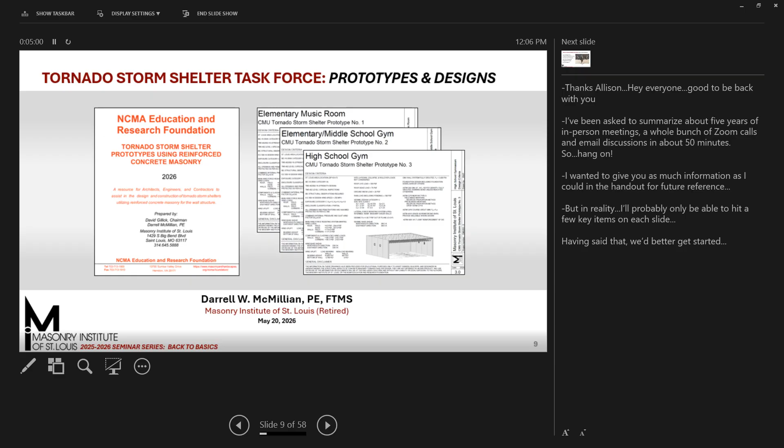Based on the learning objectives, here's what we will try to discuss today. To save time, I'm assuming everyone knows the dangers of tornadoes, so I don't have a lot of facts and figures on past ones for you. But I would like to ask, has anyone here personally experienced a tornado?

By the way, I want to say at the outset that the building code has provisions for both hurricane and tornado shelters. But today, if I only say storm shelter or shelter, just know that I'm talking about tornado shelter, since we don't get too many hurricanes around here.

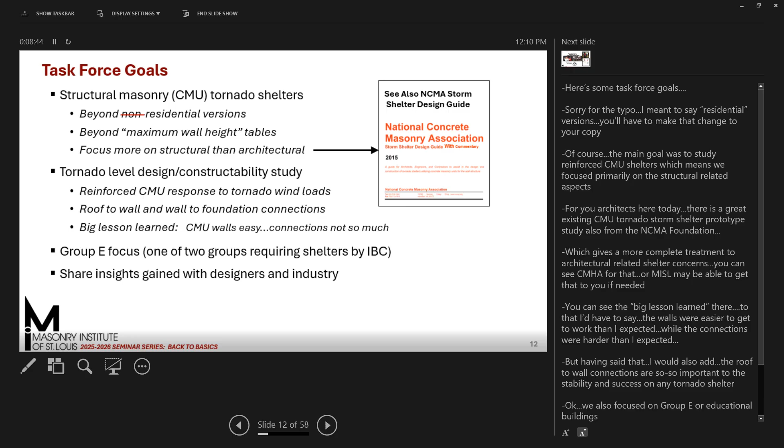Let's see. Okay, make sure I get everything down there. So let me make sure I didn't go too far. Sorry, did they mention I'm retired? It's been a while since I did some of the stuff. I actually brought 2 pairs of glasses because I wasn't sure which ones I would need.

Okay, in terms of expected outcomes, it was this, no, wait a minute, sorry. Here we go. The first expected outcome was to hold a storm shelter summit, which we did here in this room in 2021 to figure out what we wanted to do and how we wanted to go about it.

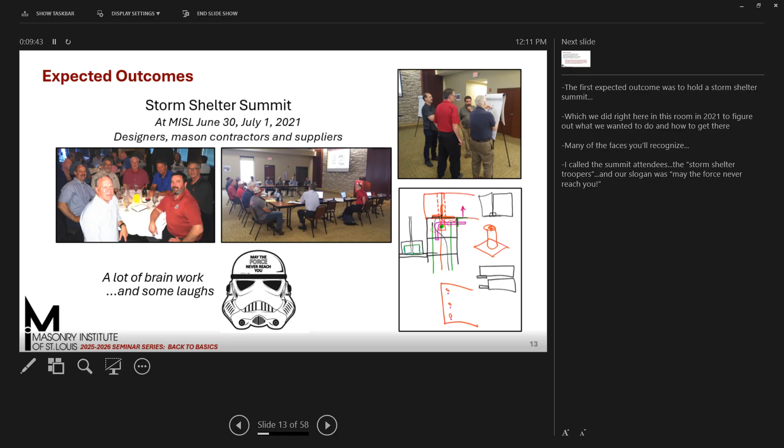Again, many of the faces you'll recognize as past presenters and being around the Institute here. I called the attendees storm shelter troopers, and our slogan was, 'May the force never reach you.' So there was a lot of thinking, but we had a little fun too. And of course we had to go out for some Italian on the hill. That was a requirement.

So it was decided to do 3 prototype studies and offer them up as shelter examples for educational purposes. And to that end, you'll see this red disclaimer here and also in the drawings and the report. The key thing I just want to mention is that we're not intending these to be shovel-ready documents. These are just examples, or a snapshot really, of a particular building responding to a tornado. But hopefully they'll be useful as examples in the future.

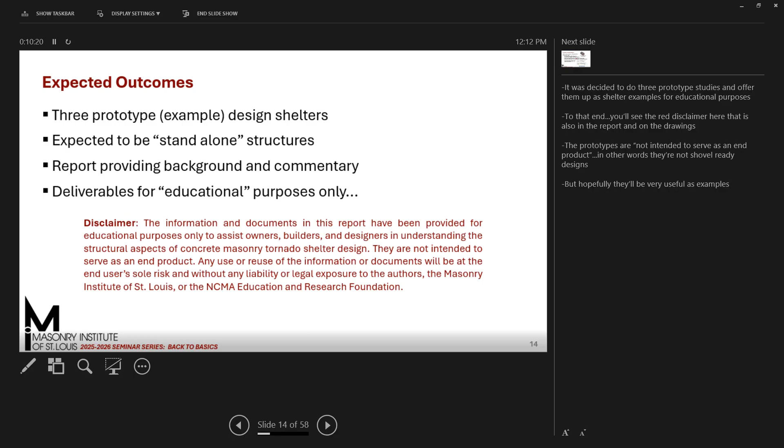As far as some of the decisions we made, most were related to challenges that came up, things we hadn't thought about before or whatever.

We did select CMU for the walls, I guess there's no surprise there. However, structural clay units could also have been used. You can design them practically the same way as concrete masonry units, so that is an option.

We decided to go with one small classroom and two sizes of gymnasiums, and all three would have varying roof systems. We knew going in that the walls were going to need to be fully grouted, primarily to provide the missile impact resistance that the ICC and FEMA require. We just automatically assumed we'd fully grout these walls, although we probably would have gotten there by design anyway due to the high wind loads.

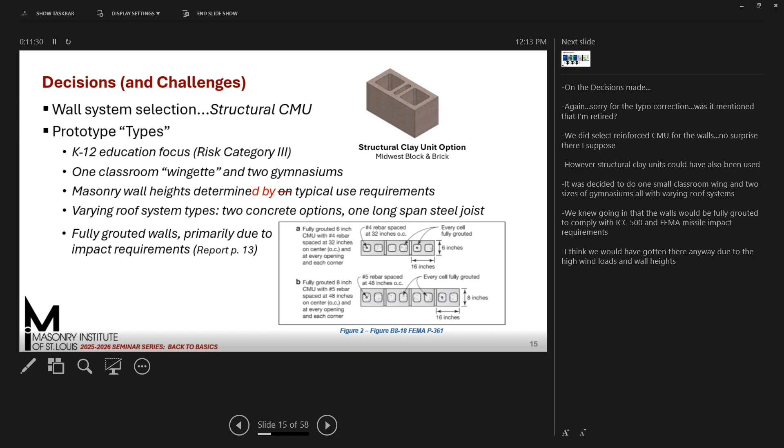Speaking of codes, in 2021 when we started the project, we decided to go with the 2018 IBC because most of the country was using it, or an older version. That has shifted some since then, as areas have moved on to the 2021, as you can see there in the green box.

However, since the 2021 IBC still references the 2016 editions of ASCE 7 for load determination and TMS 402 for masonry design, we decided to go ahead and complete the project under the 2018. We don't suspect there would be a lot of structural tweaking needed if you wanted to look at these examples in terms of the 2021 IBC.

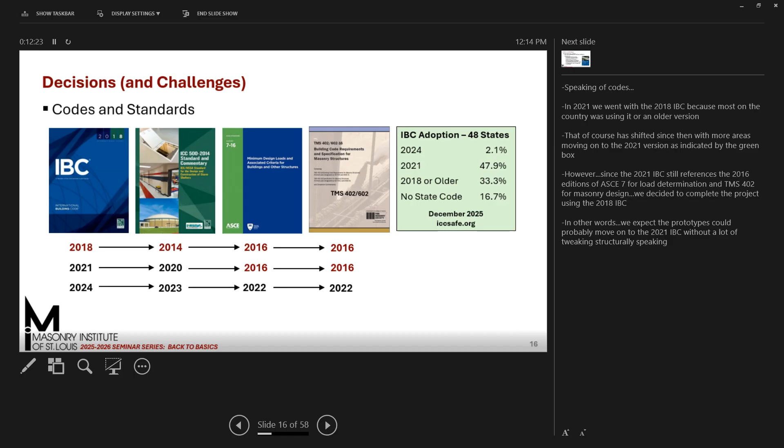2024 would be a little bit different, but now FEMA P361 is another standard you could use for shelter design for safe rooms, as FEMA calls them. In general, if the shelter is designed per P361, it will also comply with ICC 500.

Though we didn't use it directly for the prototypes, we did incorporate some P361 items into the design where we thought it was prudent. One example is we decided to go with their guideline of increasing the internal pressure related to the external wind from 0.18 to 0.55, which is about a factor of 3.

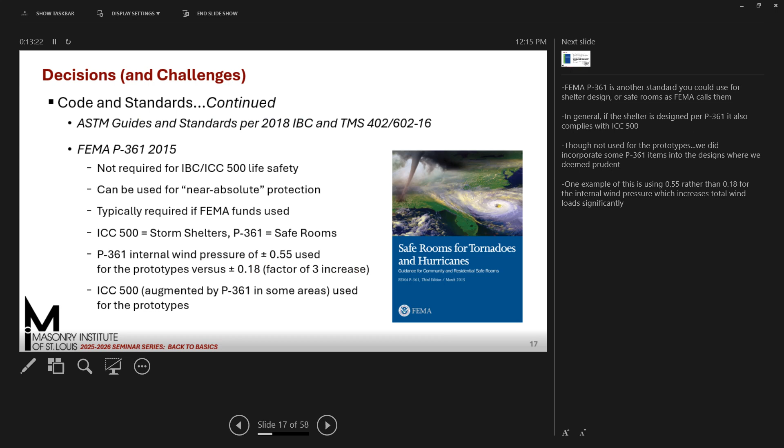So we thought, to be on the conservative side, we would go ahead and do that. On a normal building, you could probably count on 0.18, but with a storm shelter, we decided to go with 0.55.

A quick note about ASCE 7-22: they have added Chapter 32 on tornado load. It's a new chapter, but it doesn't apply to ICC 500 storm shelters.

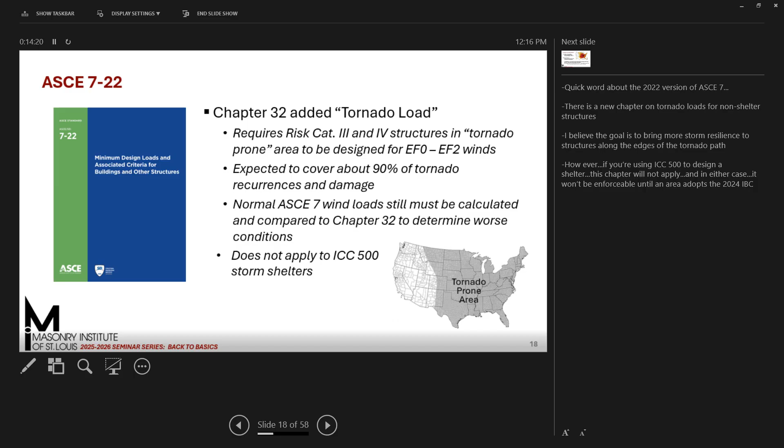So if you're required to do a storm shelter under ICC 500, in the future this chapter would not apply to you. I believe the goal here is to bring more storm resilience to structures on the edges of the storm path. They're looking at EF0 through EF2, trying to increase the amount of wind those buildings are designed for in the future. But as I said, if you're using ICC 500 to design your shelter, this chapter will not apply, and it won't apply until people start adopting the 2024 IBC.

Back to some decisions made. Locating the prototypes right here at the Masonry Institute seemed to make sense, since this building is located at the heart of the 250-mile-an-hour tornado zone.

As for seismic, since we were going to use joint reinforcement for crack control already, and since we expected wind loads to govern over seismic, which they did, we went with seismic design category C to limit the minimum seismic horizontal reinforcement required to W1.7 joint reinforcement, 16 inches on center vertically.

If you compare that to seismic design category D, that minimum would likely jump up to a number 4 bar minimum at 4 foot on center vertically. But since the wind loads were going to govern, we didn't want the prototypes to imply that you had to have horizontal reinforcement just because it's a tornado shelter.

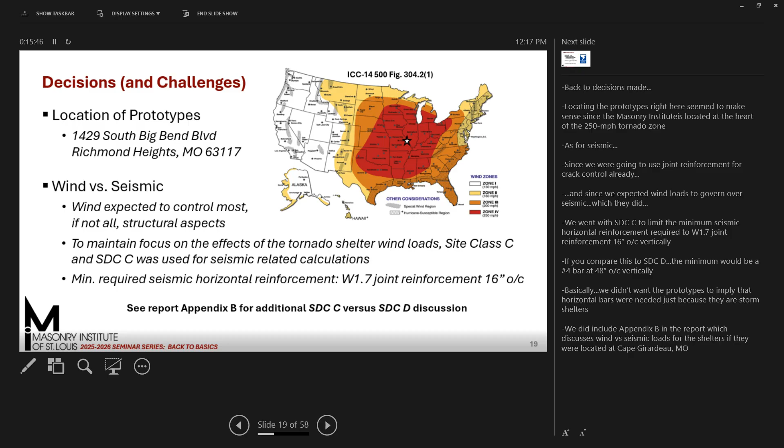If your project is closer to a fault line and your ground motions get worse, then the seismic could come into play. We tried to do a discussion of that in Appendix B of the report, where we took our prototypes and set them in Cape Girardeau and looked at what that did to the wind and seismic loads.

Prototype loads: we used 100 PSF live load, as required by ICC 500. And since we're not doing complete roof system designs for these buildings, we had to make some assumptions on dead load. You can see those assumptions there.

In terms of rain load, it's kind of an interesting one. All buildings, unless they have positive drainage, need to be designed for rain load ponding, but there's a lot of variability to that. We didn't know the final design of the roof, the slopes, or where the drains were going to be. So since you don't have to check roof live load and rain loads at the same time, we decided to put a note saying your rain loads need to be less than 100 PSF for these buildings.

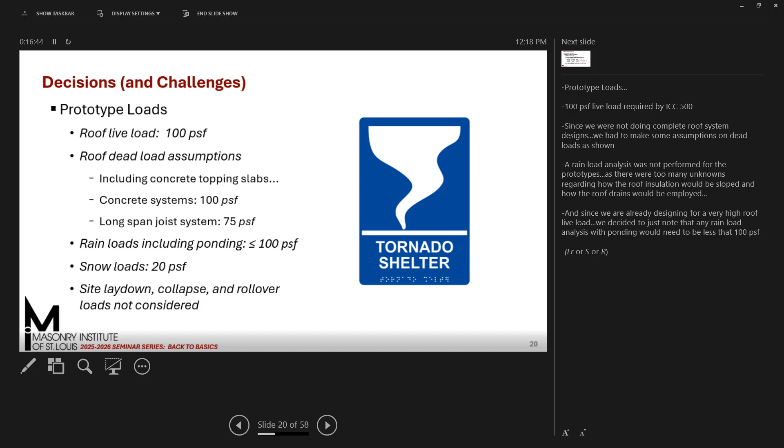Here you can see some additional parameters used for wind and seismic load. The shear wall system we selected was an intermediate reinforced masonry shear wall, which allowed for the joint reinforcement to be used as the minimum seismic horizontal reinforcement. At the bottom I've got a quick comparison of the out-of-plane wind load on walls for the third prototype, the bigger prototype, the high school gym. Seismic is 30.7 PSF and wind is 210.2, so quite a bit of difference in the loading there.

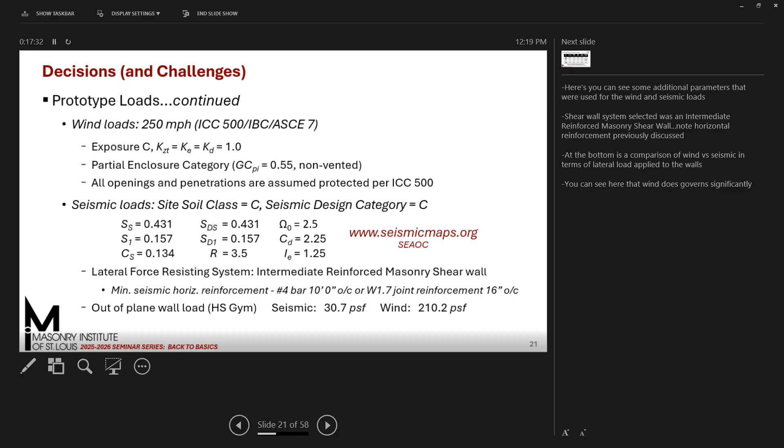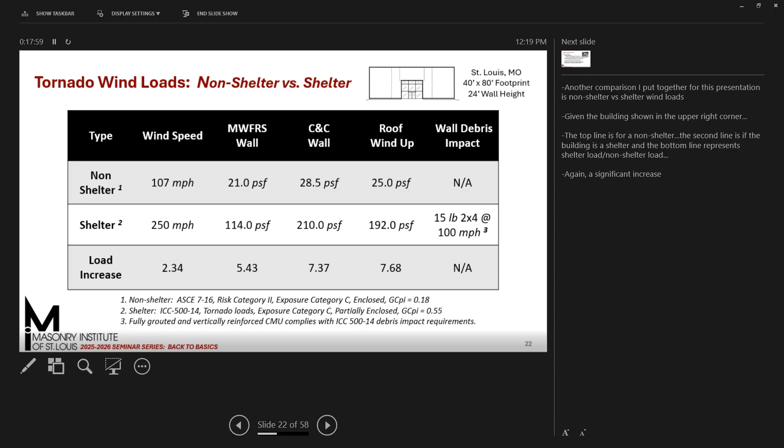Another comparison I put together is non-shelter versus shelter loads for the building given at the top right corner. The top line is for non-shelter, the second line is if the same building is a shelter, and the bottom line represents the shelter loads divided by the non-shelter loads. You can see quite a bit of an increase across the board, so we're dealing with pretty big magnitudes.

Here are some decisions related to the CMU walls. We decided to go with a unit density of 105 PCF, pounds per cubic foot, because it has pretty good availability and also because it would be on the conservative side for calculating wind uplift. The lighter the walls are, the more uplift is going to try to get its way down to the foundation.

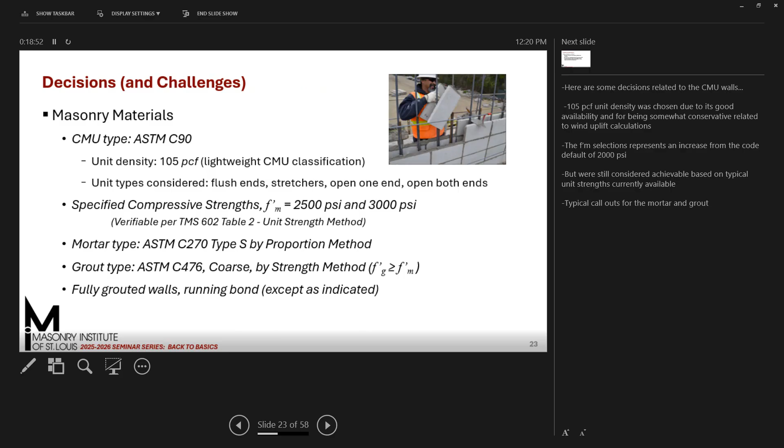The f'm we went with is greater than the current default of 2000 PSI, but we considered that the higher values could still be achievable in most regions, given the block strengths being used. Mortar and grout is pretty much your standard callout, nothing much different there.

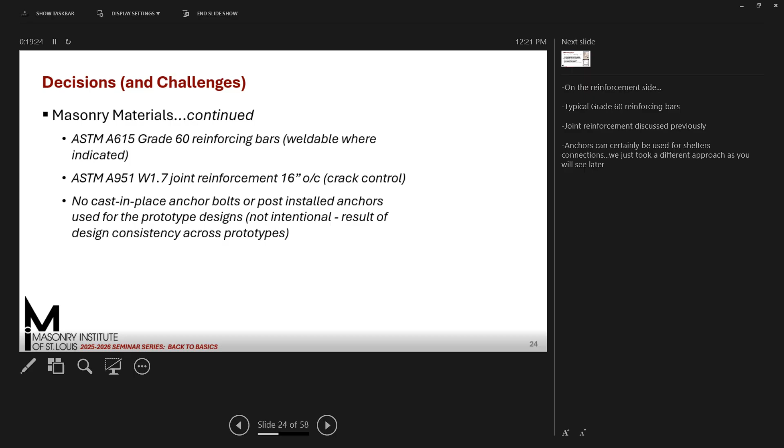On the steel side, we went with ASTM A615 grade 60. Some of those bars need to be weldable, and you can see the joint reinforcement we've already talked about. Now, anchors - the bottom bullet there - we didn't wind up using any anchor bolts or post-installed anchors. You could; there's no reason we couldn't use them on a storm shelter. But given the way we analyzed the connections, the path we went down, we decided to take a little bit different approach, which you'll see a little later.

On the design method, allowable stress design can be used for shelter wall analysis, but for a few technical reasons and preferences, we decided to go with strength design. Also, since most design calculations fell to me - which is probably why it took 5 years - and since I'm not a finite element or 3D model jockey, all the analysis was done either by hand or by spreadsheets I had developed over the years here at the Masonry Institute or while teaching structural masonry at Missouri S&T.

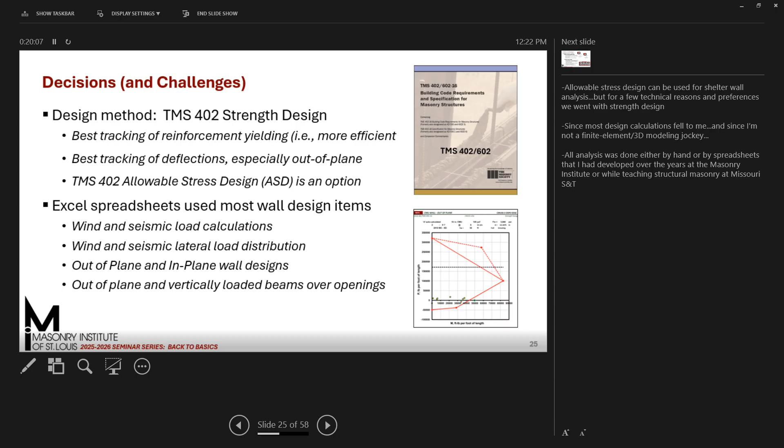Again, since we're not doing complete and final designs for the prototypes, we employed the 'by others' notation in some key areas, mainly the foundations and the roof systems. We did assume the masonry walls were pinned at the top of the foundation wall and at the roof system, and we gave guidance regarding what the walls needed in terms of doweling into the foundations. But otherwise, everything else with the foundations is pretty much just by others.

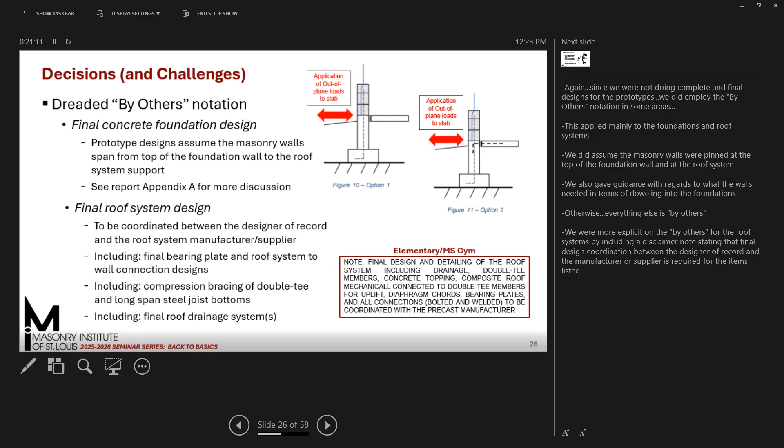We did the same thing on the roof, but tried to be a little more descriptive by including a special note on all the prototypes indicating that final coordination between the designer of record and the roof system manufacturer or supplier is certainly required to come up with final designs for these projects. We made the best assumptions we could, and tried to follow the industry literature as best we could, but there were just some things we didn't know about or couldn't know about as we put things together.

Tornado shelters in almost all cases will experience net uplift coming from the roof system as delivered to the walls. What I'm calling a tie down here is a dedicated vertical bar in the wall solely to connect that uplift directly down to the foundation. In that case, all the other vertical bars in the wall are just there to handle the out of plane load hitting the face of the wall, which puts that bar in tension.

However, for the prototypes, we were able to size the walls and the vertical reinforcement to do double duty, which means the vertical bars within the wall can handle both the out of plane wind load and deliver the net uplift simultaneously and safely down to the foundation. So you won't see any tie downs in the prototypes, but that is certainly an approach you could take on some of these high uplifts.

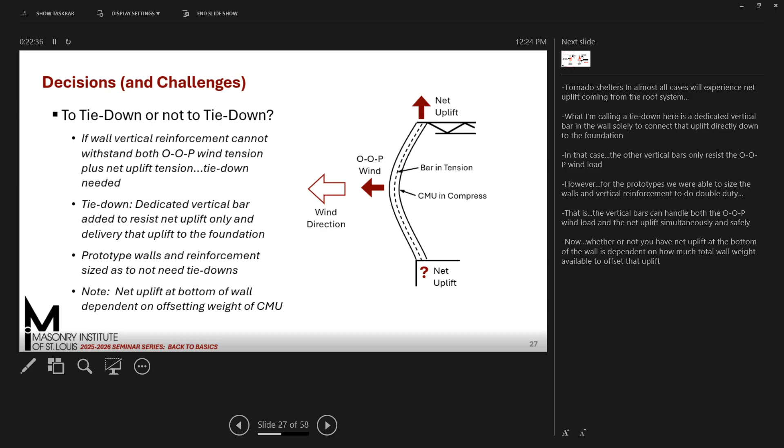As far as the bottom of the wall, whether or not you'll have net uplift there is pretty much dependent upon how heavy your wall is. Because if you have net uplift at the top, you start subtracting that net uplift by the weight of the wall as you go down. If you overcome that weight of the wall, then you will have some uplift there, which has to be accounted for.

Another thing that we decided to do was have all roof and floor diaphragms, your horizontal floors and your roofs, have chords to help them act as beams so they can deliver their load to the walls. On a normal CMU building, this is typically done in the top course bond beam, as you can see on the left there.

But for our shelters, where the loads are quite a bit heavier, especially on the uplift, we decided to take the other option, which can be done, and that is to show the diaphragm chords within the diaphragm itself, as you'll see here, if I can find the laser.

As you can see right here, this is the diaphragm slab, and we're assuming that the diaphragm will be placed there. That just kind of lightens the load on what we're expecting those bond beams to do at the top of the wall. You also get a certain amount of distance between, if you do the diaphragm here, which often works, there's quite a bit of difference between the diaphragm forces that all has to be gotten down to the bond beams.

We still have to do that here, and we did, but this at least lightened the work it has to do. And by the way, these circle arrows represent the kind of top of wall moments that get induced as the floor or roof does what it does, okay?

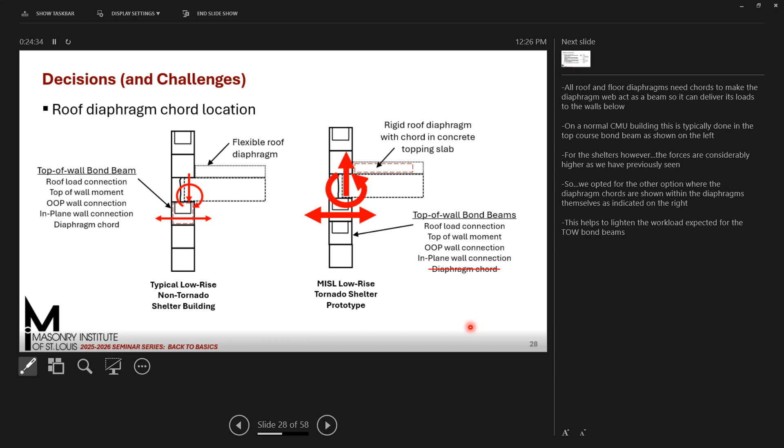As you can imagine, if you have a storm shelter with a lot of uplift coming from the roof, that wall is going to have a lot of rotation on it. So we wanted to make sure that our top of wall connection and the bond beams there were able to handle all that.

Now, many, if not all, low-rise school buildings have wall extensions, or what we call parapets. But again, we wanted to focus on the walls themselves, so we decided to go only with enough top-of-wall extension to provide coverage to the roofing, what we anticipated to be the roofing, and in some cases to provide the missile impact protection required.

What we did then do, when we calculated the winds, we took the overall height, you can see the 16 feet 8 inches there in this case, as the height of the building when we did all of our wind calculations for the main wind force resisting system and the components and cladding.

Now, you can have parapets on a storm shelter, but you have to decide whether you want them to remain during the tornado or consider them to be sacrificial, okay? If they're not sacrificial, then you have to design them to withstand the same tornado wind loads as the rest of the wall, and figure out what impact that has on the rest of the wall, plus your connections and everything else.

So you can certainly have parapets, but you just have to make another decision and maybe some extra design there. We kind of wanted to simplify that, because if we show a 2-foot parapet, then somebody would want a 4-foot parapet. And if somebody, anyway.

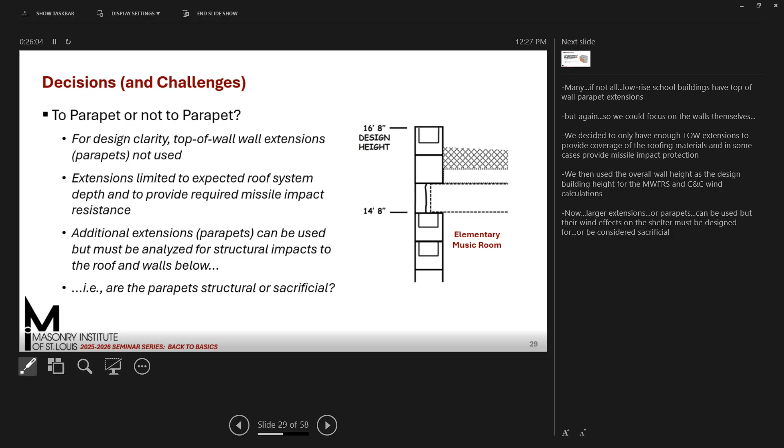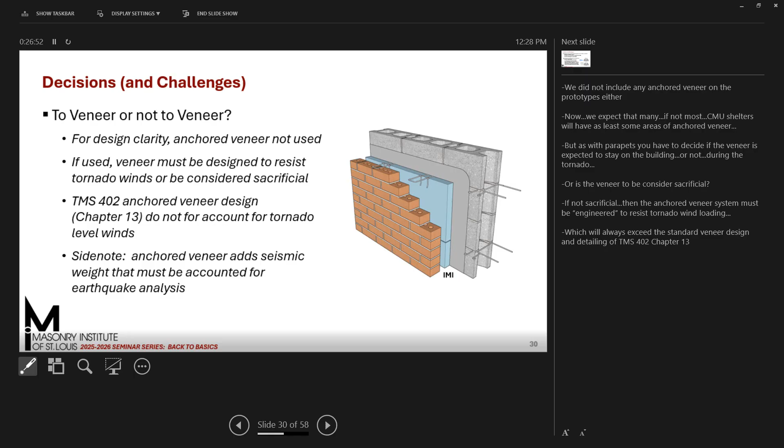We didn't include any anchored veneer on the prototypes, although we do expect that many CMU storm shelters would have at least some areas of anchored veneer. Similar to the parapets, if you're going to have anchored veneer, you have to decide: are you expecting it to stay on during the tornado, or is it sacrificial? If it's not sacrificial, you have to engineer the anchored veneer system to withstand those tornado loads. Note that tornado loads will always exceed the loading designed to in TMS 402 Chapter 13, the anchored veneer chapter. They're good for normal building wind loads, but not for storm shelters.

The masonry module was used religiously throughout the prototype, which is always a good recommendation. We use standard CMHA empirical vertical control joint placement, a 3/8 inch wide joint, spaced no more than 1.5 times the wall height, or 25 feet 4 inches maximum. If you look into the drawings, you'll see we did hit the maximum a couple times because these walls are tall.

In terms of the control joints, we expect the horizontal reinforcement, the joint reinforcement primarily, to terminate at control joints. But at the top of the wall bond beams where the connections are going on, we expect the grout and the horizontal bars in those bond beams to go through the control joints for continuity, for the sake of the building.

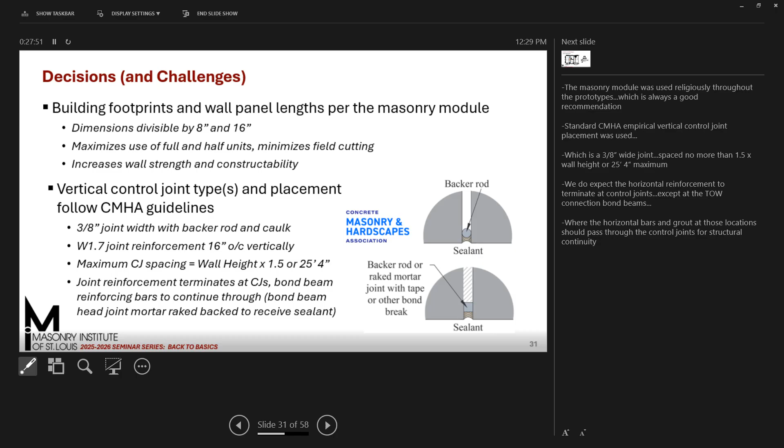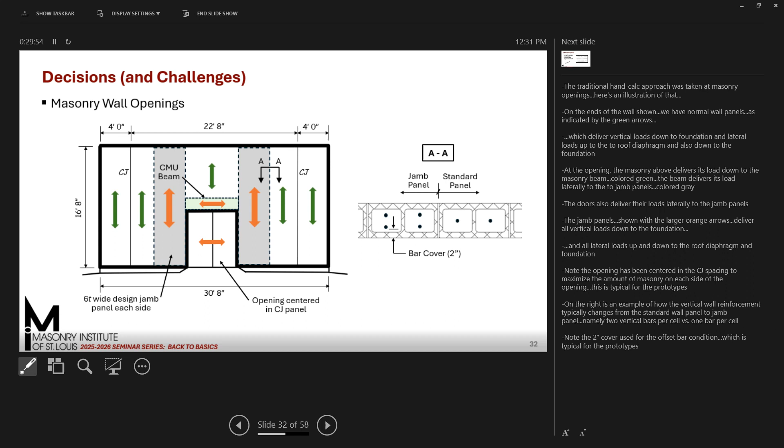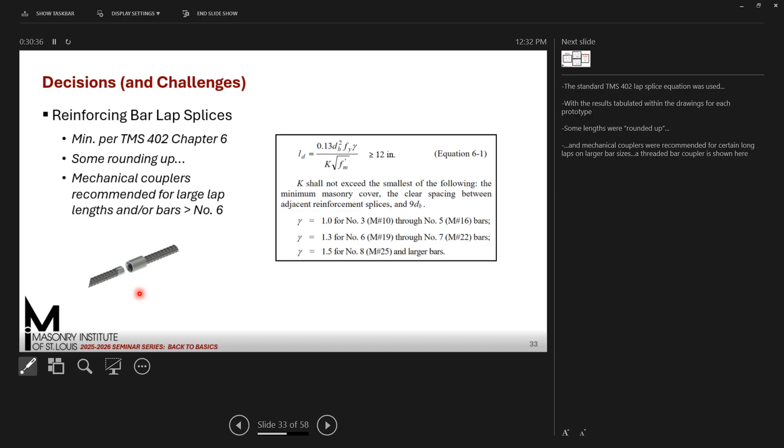Okay, so that brings us to the task force deliverables. Sorry, that was kind of quick, but I wanted to get to this section so we'd have time to go through the drawings a little bit. As I said, I have more information than I knew I could cover, but I wanted you to have it for future reference. Now we can take a look at what the prototypes actually look like, which is really the main deliverable, I think.

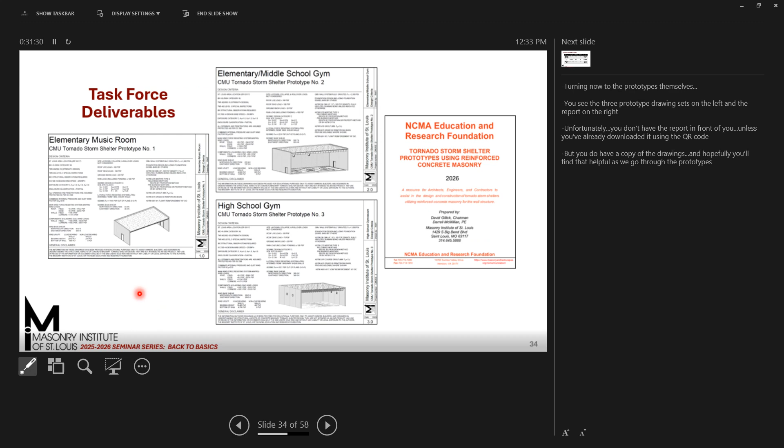For the elementary/middle school, the clear height is set by the bearing height for the double T's, which is 26 feet. For the high school gym, the clear height is going to be around 30 feet. We're using a top chord long span truss there, so it depends on how far down that joist winds up coming, but we're estimating about 30 foot of clear height, which should be good for most volleyball, basketball, and things like that.

Just a note about the high school gym walls, you can see it's 16 inches. We could get them to work at 12-inch CMU, but for the sake of the top of wall connections and a few other things that came up, we decided to go with 16-inch units for that larger gymnasium. Now, while 16-inch units are not real common, the molds are available, and they have been produced in the past, and I think I saw Mark's here with Midwest Block, so if you have any questions about that, I'm sure he can help you out.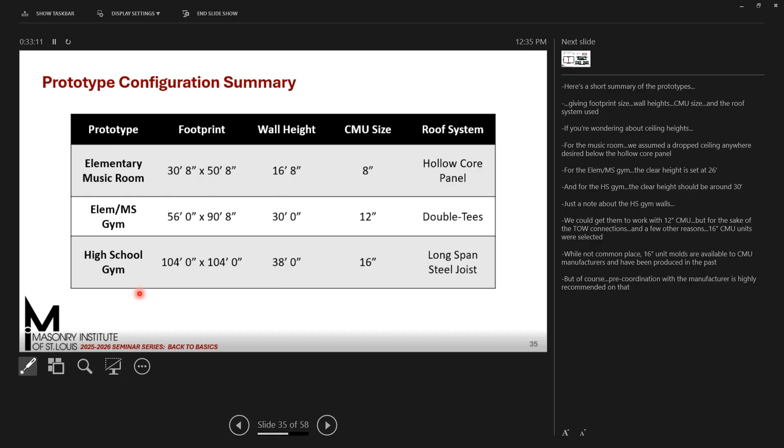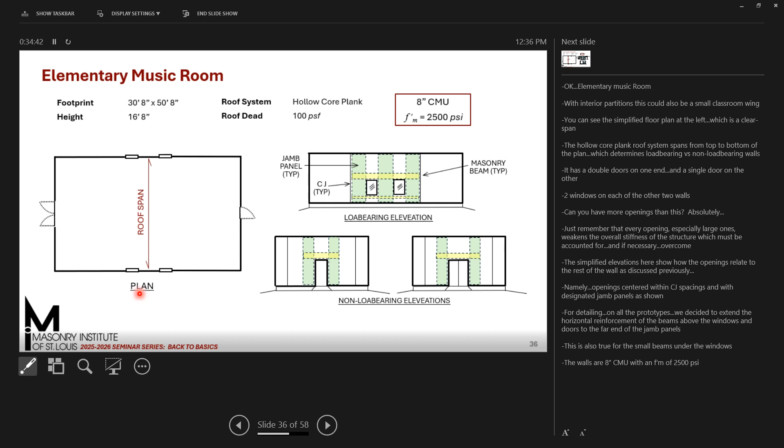We also decided for the reinforcement over the windows and below the windows, these are beams, CMU beams. Whatever reinforcement they required, we extended those to the outside edge of the designated jamb panel. This prototype is 8-inch CMU with an F'(M) of 2500.

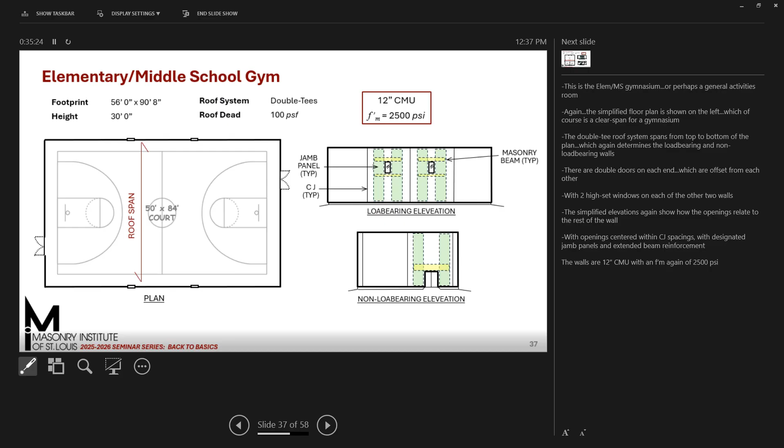The next one is the elementary middle school gym, or perhaps could be just a general activities room. Again, the simplified floor plan on the left shows the roof spanning, in this case a double T system, from top to bottom of the floor plan. That again determines which walls are load bearing and non-load bearing. We have double doors on each end that are offset, and then we have 2 windows on each of the other 2 walls. And again, the way we handle the openings are the same as the previous prototype. This one is 12-inch CMU, again with an F'(M) of 2500.

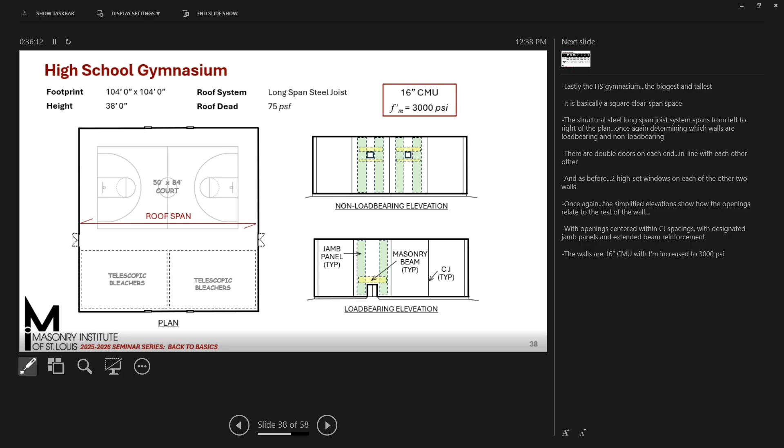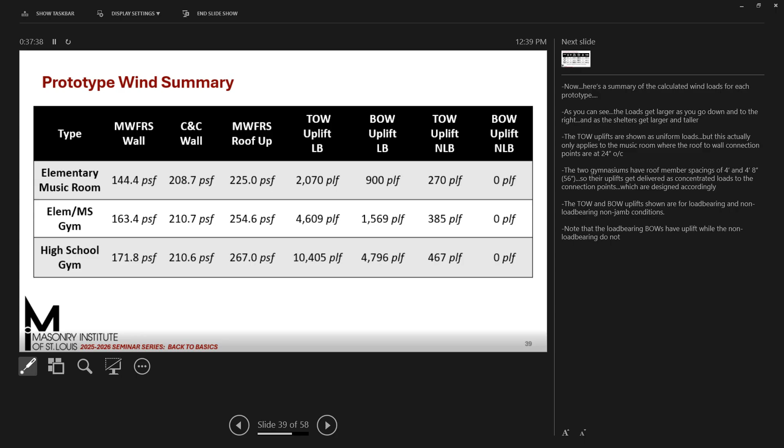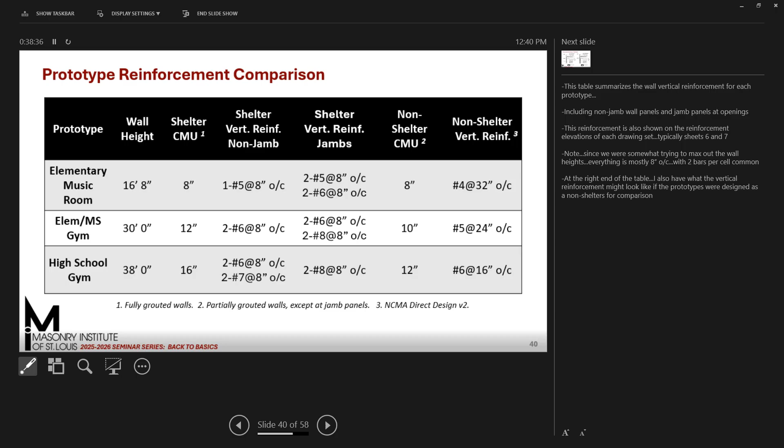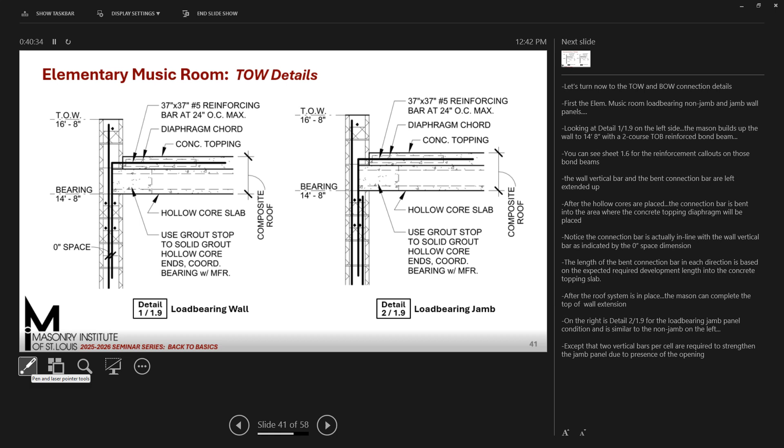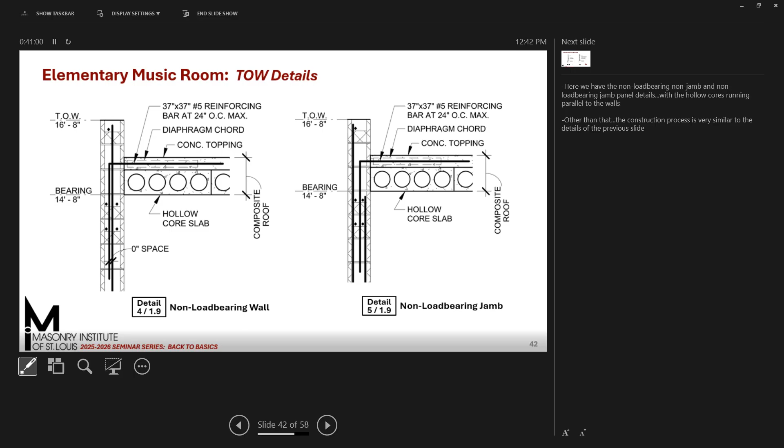So looking now at the bottom of the wall details for this same prototype, we have the non-jamb conditions shown. Sorry again for the typo, I was getting my titles crossed up. So this is for non-jambs, but it's load bearing and non-load bearing.

Anyway, the left detail is for the non-jamb load bearing wall, where the dowel is married to each vertical bar due to the uplift coming from the wall and to offset the out of plane and in plane wall shears that are felt between the bottom of the wall and the foundation.

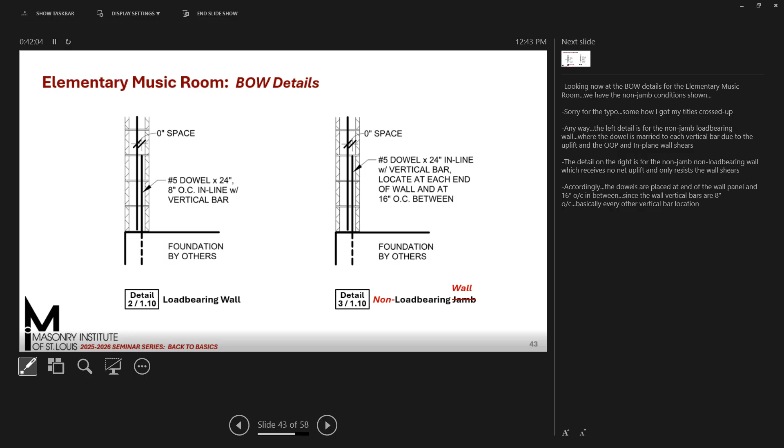The detail on the right is for the non-jamb, which receives no uplift and only resists the wall shears. Accordingly, it's not quite as heavily reinforced. You can see there's a dowel at each end of the wall panel, which we assume is where the control joints are, and then 16 inches on center in between, which is basically every other vertical bar.

This is for the bottom of the wall jamb panel conditions, both load bearing and non-load bearing. Once again, sorry for the typo.

The left detail is for the load bearing jambs, where the dowels are again married to each vertical bar due to the uplift and wall shears. So we have 2 bars per cell. Each bar is to get a dowel bar into the foundation.

The right detail is non-load bearing, so it has less load, and again, those dowels are at the end of each wall and 16 inches in between, basically every other vertical bar location.

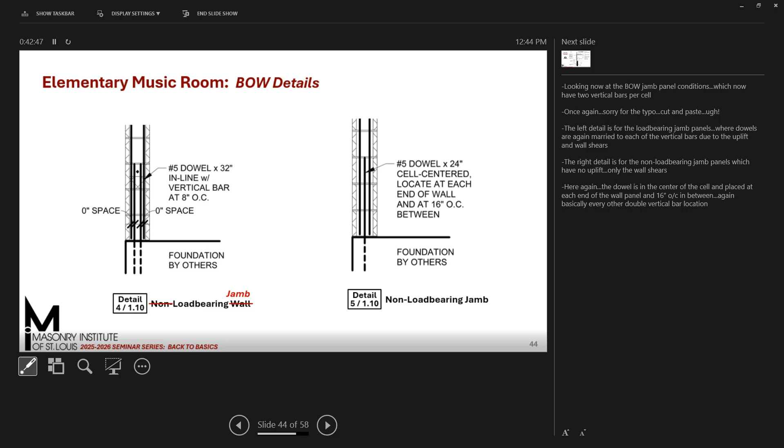Moving on now to the middle school gymnasium. Here we have the 12-inch wall built up to 26 feet, which serves as a bearing point for the ends of the double T.

The double T is welded to a slotted plate. It's not really called out here, but we'll see that in a minute. The slotted plate is then welded and bolted to the masonry plate below.

The masonry bearing plate is connected down into the 12-inch wall with 4 reinforcing bars, 2 of which are welded to the plate and 2 of which are threaded bars passing through the plate.

The 2 outside bars transfer the lateral load from the top of the 12-inch wall into the double T system. The inner 2 bars transfer the uplift coming from the double T into the wall below, and also reinforce the wall to overcome any moments that the double T will put into it.

Above the 26-foot bearing height, we have a 6-inch CMU closure wall to enclose the ends of the double T's and provide missile impact protection.

The closure wall also delivers the in-plane shear from the concrete topping slab diaphragm via similar bent connection bars at the top and vertical bars extended down into the 12-inch wall below, delivering that shear from the diaphragm down to the wall below. So that 6-inch wall is actually acting like a short cantilevered shear wall to do that for us.

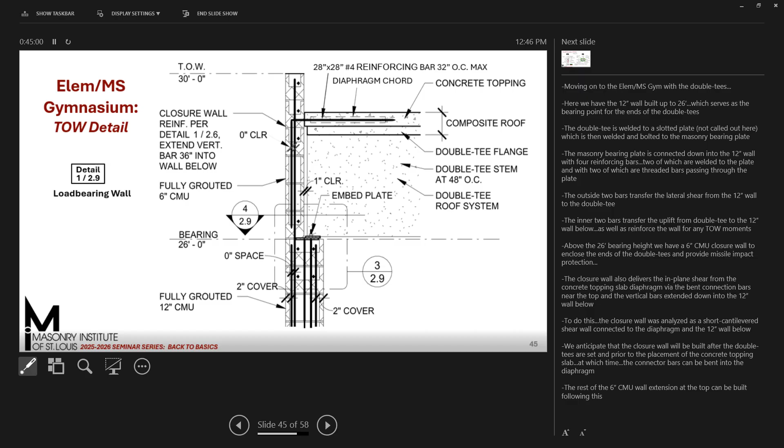So these details should help us further visualize the connection we were just looking at. I've also color-coded some of the items to make things easier to follow. On the left detail, you can see the masonry bearing plate colored green. Hope that comes through.

And the two welded outside shear bars colored blue, along with the two threaded bars passing through the plate colored red.

Above, you can now see the slotted plate called out as mentioned before. It may be a little hard to see, but the slots are parallel to the length of the double T. That's to allow for adjustments and movements while the double T dead load and the concrete topping slab dead load are being placed and settling in.

Once that settling in happens, then the nuts, washers, and final welds are done. You can see we have two welds: the first welds the double T to the slotted plate, and the second welds the slotted plate to the bearing plate after things have been set. Then the nuts and washers can be final tightened to complete the connection for the system.

Now you can see this also in the right-hand plan view of all this. Again, we've got the green plate for the masonry plate outlined in green, the blue shear bars, and the red tension bar moment bars.

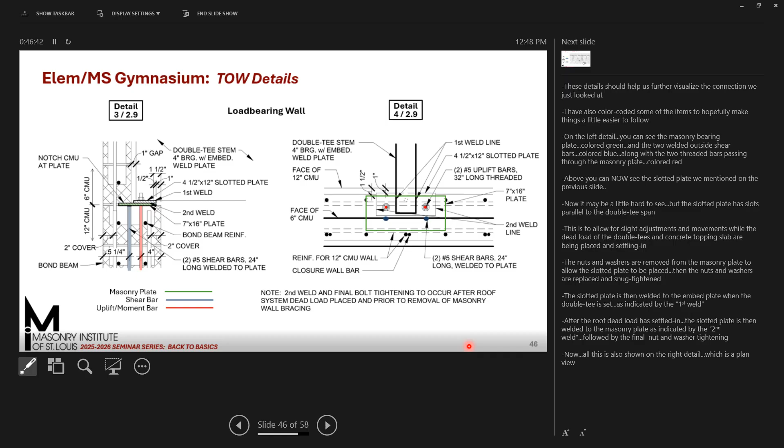Now, to help visualize this, here's a sketch idea we used while working on this. I was interested in how those concentrated loads coming from the double T's would find their way down into the wall, and we followed TMS guidelines, which specify a 1 to 2 distribution.

You can see I used the same color coding here: green for the plate, blue for the shear bars which are 24 inches long, and red for the uplift and moment bars which are 32 inches long. So you can see the red bar extends down past the other bars.

And you can see the influence areas here in the dotted lines. These lightly gray dotted lines represent where the horizontal reinforcement is in the top of all bond beams, and also the beams that are over the opening.

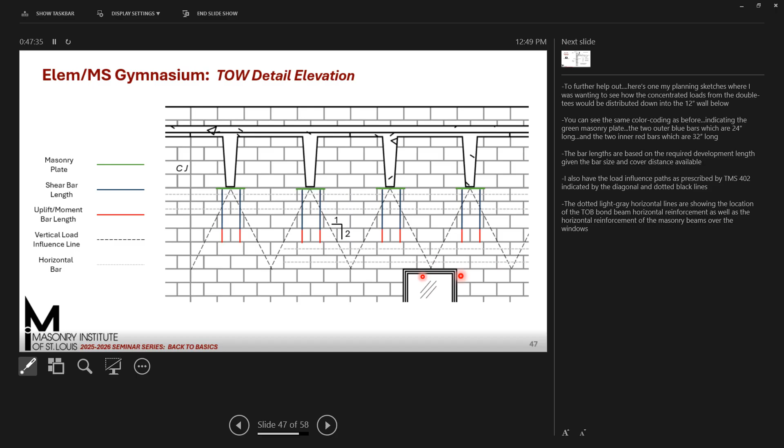This is the condition for the non-load bearing where the double T's are running parallel to the wall. This is actually a little simpler. We went with the same approach. The 12-inch wall can be built full height since we don't have to provide bearing for the double T's. We use another bent bar connector to connect to the diaphragm of the double T's.

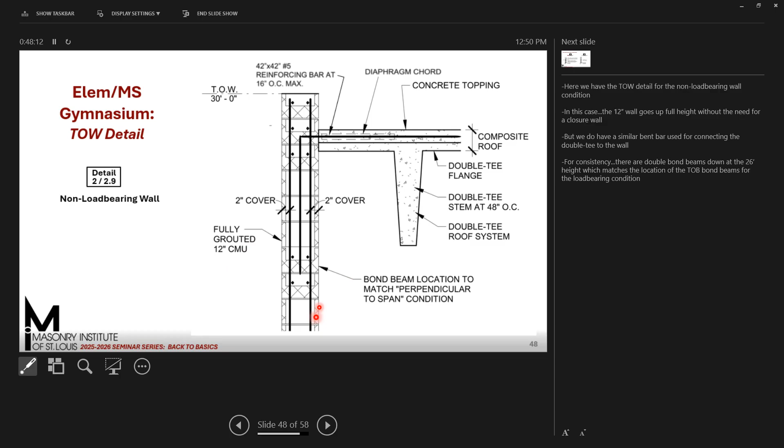You'll also notice for consistency, there's two bond beams at the 26-foot height for the bearing. We decided to run that all the way around the building, just so there would be no confusion about where those bond beams start and stop.

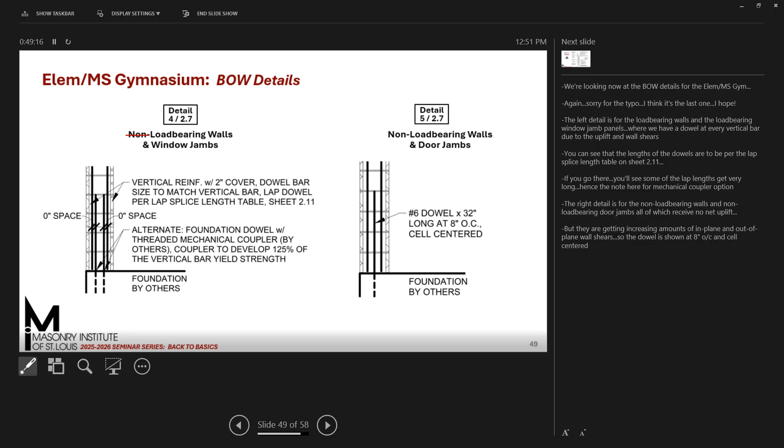Moving on to the high school gym where we have the long span joist, which you can see the top chord bearing condition there. Though everything is bigger, going with the 16-inch walls and the way the top chord bearing allowed us to do things, detailing got a little bit easier actually.

So we do have 16-inch walls that would be built up to the 36-foot point, which serves as the bearing point for the ends of the joists. The joists are welded to a masonry plate, which is connected to the wall below. Again, with 4 bars. In this case, they're all the same length, but they are doing the exact same things as the previous prototype. The length of these bars, because of the bar size and because of the cover distance we had available, went to 56 inches.

Above the bearing height, we have a short 6-inch CMU closure wall that encloses the ends of the joist and the roofing and provides missile impact resistance as needed. The closure wall in this case was analyzed as a short cantilever resisting its own out-of-plane loads only. And those were wind loads, by the way, or tornado wind loads.

Because we expect the shear will go directly from, this will be a composite roof, so the shear of the diaphragm will go directly through this joist end. And so we've got a note there for the joist manufacturer to be sure and look at that, make sure they have enough rollover resistance in these joist ends to get that load down to the wall below.

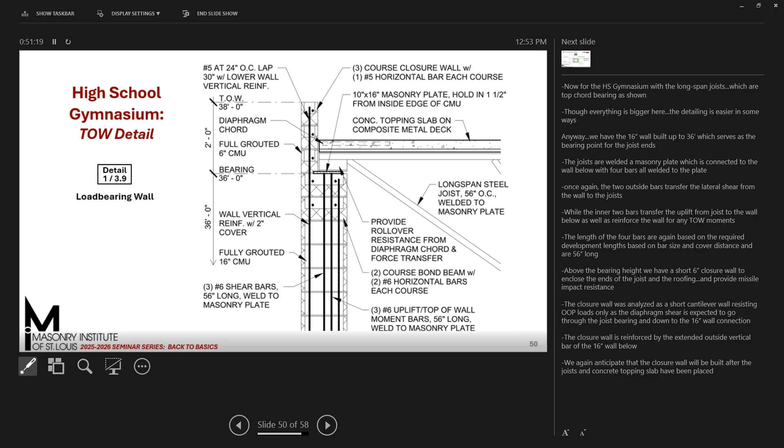Here's a plan view of that same detail. You can see the green masonry plate. You can see the 4 bars used for shear resistance and uplift. Yeah, I think that's pretty good.

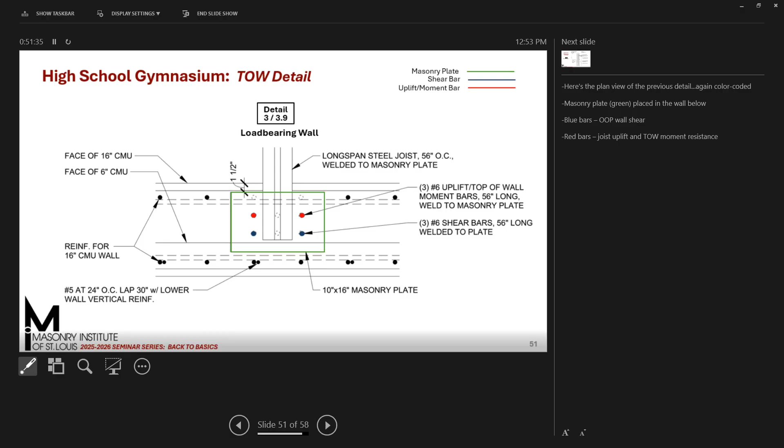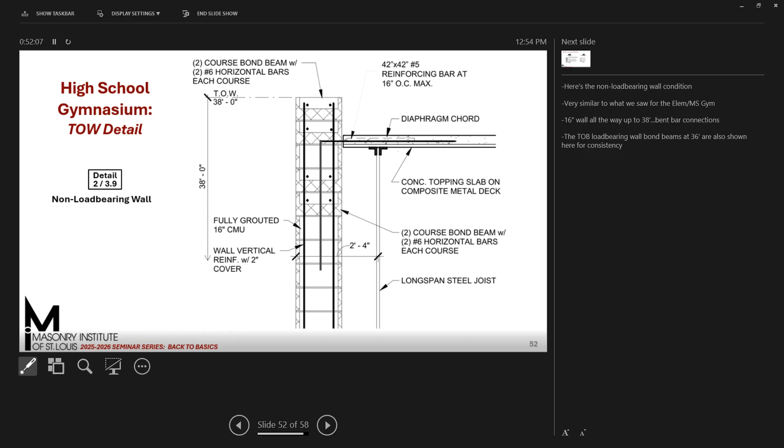This is a non-load bearing condition, where again, we're building the wall up to 38 feet since we don't need to provide bearing for the joist. And again, we're using that same bent bar connection, connecting the wall to the diaphragm topping slab there of the roof system. Here's a case where we looked at doing anchor bolts, but we just felt like to be consistent, we went with this bent bar situation.

Bottom of the wall conditions, very similar. We have dowels that match the vertical bars when it's load bearing because of all the uplift. If you're non-load bearing, you get a dowel just required in the center.

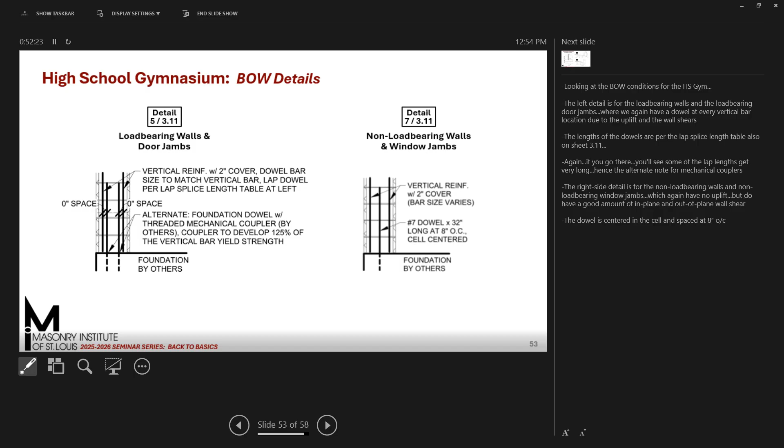Now, both the gymnasiums had an interesting little detail at the top corners of the load-bearing walls. If you turn to sheet 2.3, this is for the elementary middle school gym. On sheet 2.3, you'll see 2 elevations there. And up in the upper right corner, you'll see a little bit of something going on up there.

Well, what's going on is because the non-load-bearing walls come through, when you build up to the closure wall, and the end wall, those larger units are going to go through, and the 6-inch unit needs now to die into the end walls. You can see that shown here in this plan view detail, where we have the 12-inch units coming through to the corner.

But here we need to provide the bearing for the double T, so this is a 6-inch closure wall. And where those come together, we decided to put a short control joint, just to allow for some movement over time between those two so they won't push on each other too bad.

Now this detail here is just to show how mason contractors always do a 12-inch corner. If you're not familiar, a 12-inch corner doesn't turn all that nice, not as nice as an 8-inch unit, so they always have to do something at the corner to make that work out. We're just kind of replicating that here.

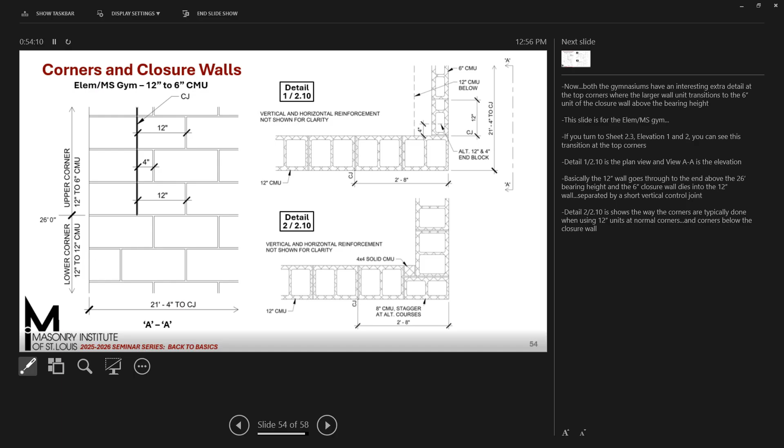Okay, well, that's a quick overview of the prototype drawings. I know it's really fast, but you've got them there in front of you. If you ever have any questions, you can reach out to Bruce or Greg, and they can get a hold of me if needed.

But I want to start wrapping some things up on application. We hope that you all can use these as examples, showing that concrete masonry units, structural concrete masonry, can be used as tornado shelters. The wall heights we're showing you can consider as maximums, but your own shelter design may be shorter, whatever the case may be, and you may be able to do some things a little differently.

Just remember these are not shovel-ready designs. There's a lot more decisions that need to be made. One thing in particular is the code requires independent peer review for final designs of tornado shelters, so that's something that would definitely have to be done.

One thing I didn't have time to touch on is quality assurance, quality control. For shelters, special inspections and verifications are definitely in play, even more important. Also structural observations, which require an engineer to look at the structural system anytime there's a high elevated wind load, so that would also need to be done.